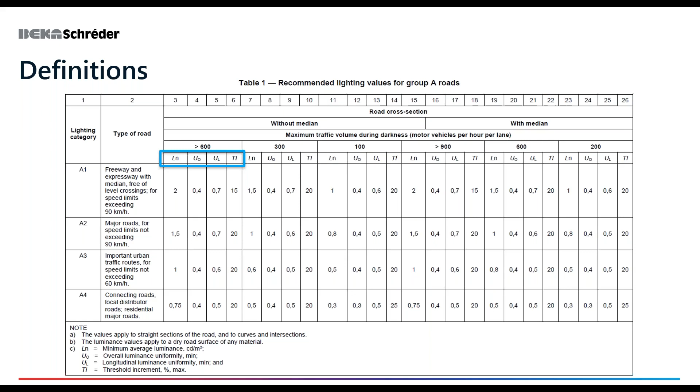Going into the next slide - I think most of the audience might be familiar with this table in SANS 10098 Part 1, but for those who aren't familiar with this type of design, it's necessary to go over the metrics that form the A-class definition. There are typically 4 metrics: minimum average luminance in candela per square meter, overall luminance uniformity, longitudinal luminance uniformity, and finally threshold increment.

Sorry, just moving something out of my way on my screen. In the next few slides, I'll try to clarify a little what these represent. For those who know, this will be a bit of a refresher. For those who aren't familiar, this might be some good information to learn.

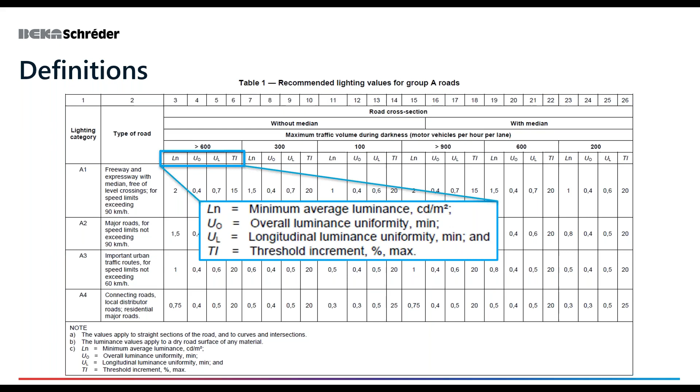The first metric we come to is average luminance, marked by LN. This is the mean luminance over a specified section of carriageway, viewed from a specified observer position that's 60 meters in front of the first transverse row of calculation points and 1.5 meters above ground level. The field of calculation should cover a section of road between two luminaires in the same row. For average luminance, the position of the observer must be at 1/4 of the carriageway width from the left-hand side of the road when driving on the left.

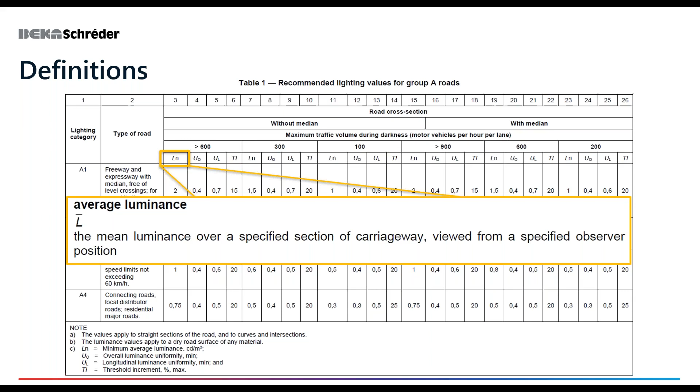The next metric is overall luminance. Just to recap, I'm quickly going through the metrics so that we can understand A-class roads, and then delve into how to design for curves of a road.

The next metric is overall uniformity. This is the ratio of the minimum calculated luminance value to the average calculated luminance value. The observation position must be at 1/4 of the carriageway width from the left-hand side of the road, as for luminance. I've noticed over time that some people do struggle with understanding what overall luminance uniformity is.

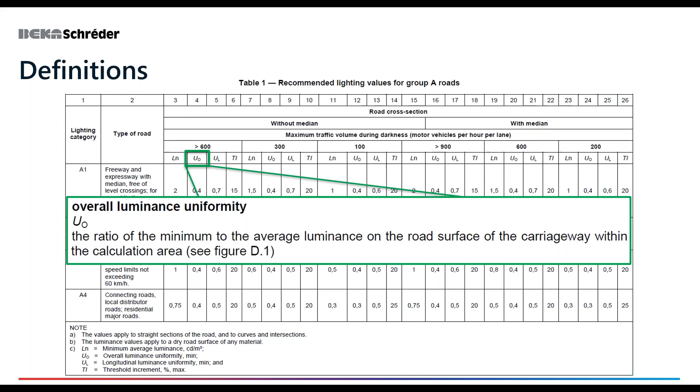So I've created an image to indicate what overall uniformity is. As you can see, I've created two identical areas with the exact same luminaire, placed at the exact same mounting height, in the center of each area. These areas are exactly the same length and width, and the luminaires are at exactly the same mounting height.

The only difference is the optic I've used: the area with bad uniformity on the left has a luminaire using a narrow beam, and the area to the right has a luminaire using a wide beam. It's easy to see that the area with good uniformity has a much smaller difference between the minimum value of 49 lux and the mean value of 142 lux, giving an overall uniformity of 34%, compared to the area with bad uniformity with a value of 7%. Those values are shown top left and top right on the image.

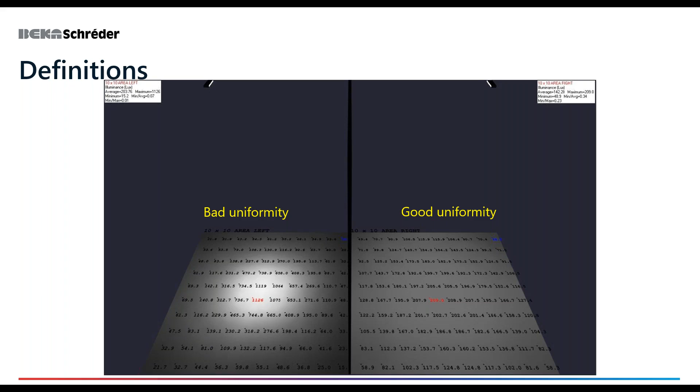I've then created a pseudo intensity image just to highlight, through use of pseudo intensity color, the spread or distribution of the flux incident on the two surfaces. It's quite clear that there is a major gap between the minimum lux value and the average lux value in the leftmost image, whereas that same gap has significantly reduced in the image to the right.

On the left, you've got a really bright hotspot with very high maximums, and in the corners you can see the very low minimum, so that ratio is quite high. But on the image on the right, although the average illuminance has reduced a little, to about 142 lux average, you've got a much more uniform spread of illumination. For the person viewing the luminance as they drive, it's very important to have good overall uniformity.

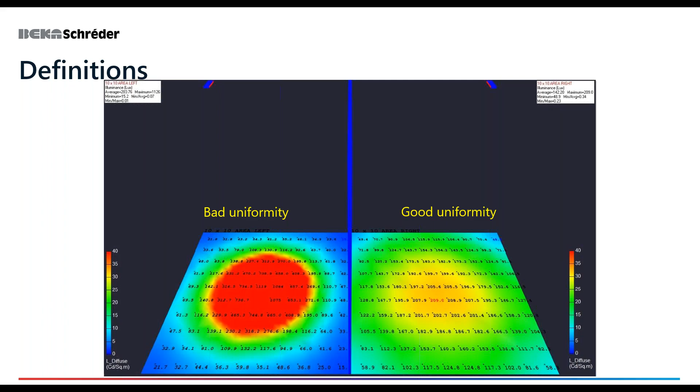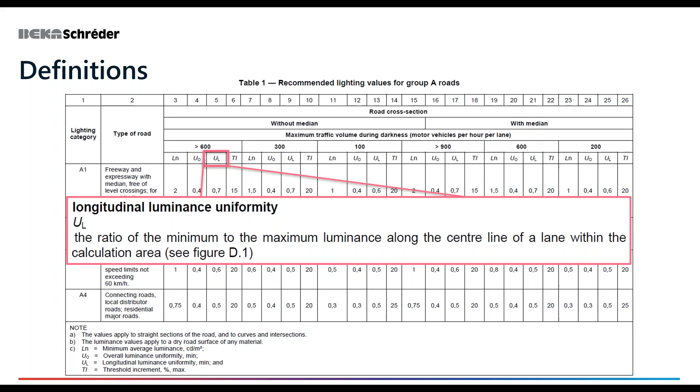The next metric is longitudinal luminance uniformity. This is actually a very important form of uniformity. It's calculated for the center line of each lane, and is the ratio of the minimum value to the maximum value, with the observer placed in the center of each lane at 1.5 meters above the road, facing the direction of travel, measuring the minimum and maximum value, and expressing it as a percentage difference.

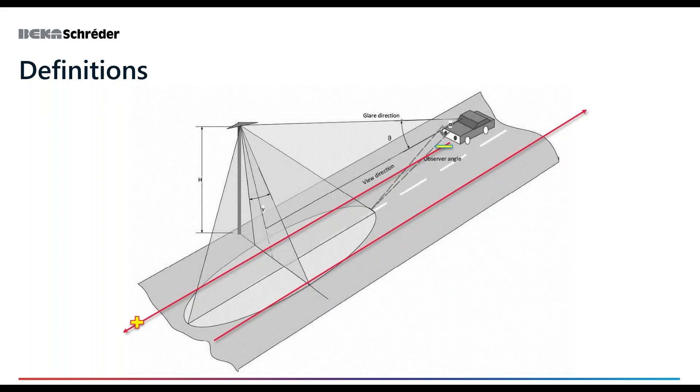Why do we do this? We do this because we need to minimize the zebra effect. The zebra effect is repeated bright and dark regions on the whole road surface, which may cause strong psychological and visual disturbances to drivers, which can become dangerous in the sense that it can cause visual fatigue, your eye having to consistently make thousands and thousands of adjustments to adjust your visual acuity.

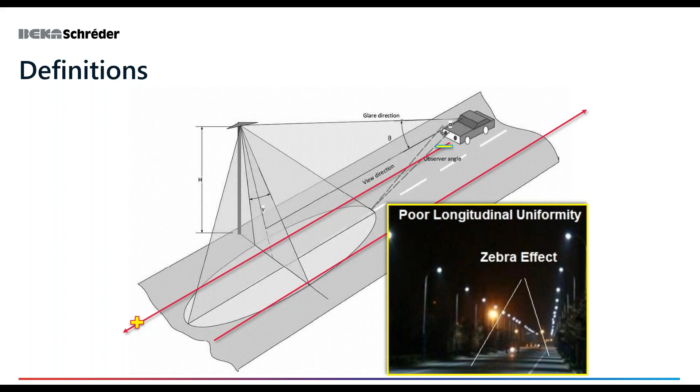Some also say this can cause a type of hypnosis. All of this is dangerous to the road user, to all stakeholders on the road. So it's very important to have good overall uniformity and good longitudinal uniformity. You'll always notice in A-class roads that the requirement for longitudinal uniformity is higher than that of overall uniformity. This is purely for that visual comfort aspect, to make sure that we provide an environment where you can see comfortably and without any undue strain in the whole visual process.

The final metric we look at for A-class roads is your threshold increment. The description in SANS 10098 Part 1 says it's the percentage increase in contrast required between an object and its background for the object to be seen equally well with a source of disability glare present. The threshold increment, or TI, is expressed as the difference between the value of the threshold under glare conditions and the same value without glare.

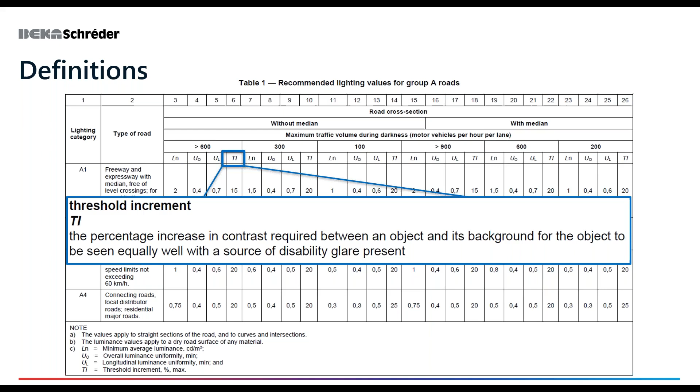This is expressed as a percentage of the value without glare. I've tried to find an image that really represents what's being said here, because I know language can become confusing. When I started in lighting, this was something I really struggled with, but I think I found something that might help.

In this image, on the left and center, you can see the sources of glare in a pseudo intensity view along the road. On the right, I've tried to indicate the object to be seen with a source of glare present. You'll notice that due to a large difference in contrast between the source of glare and the object to be seen, we cannot see into that area at all. There's no way we can see what's happening there.

This image also shows a little more clearly the effect of veiling luminance, which is a luminance superimposed over the eye's retinal image produced by stray light within the eye. The word veiling luminance gives you a good verbal understanding of what that light does.

My mentor, Mr. Marie Cronier, always said it's like the bride's veil - the light being emitted out of the luminaire creates a kind of veil over the retina, over your eye, over your perception, and you have to look through that to try and see. This is why it's important to take TI into account, and that's why the standard allows for a threshold increment.

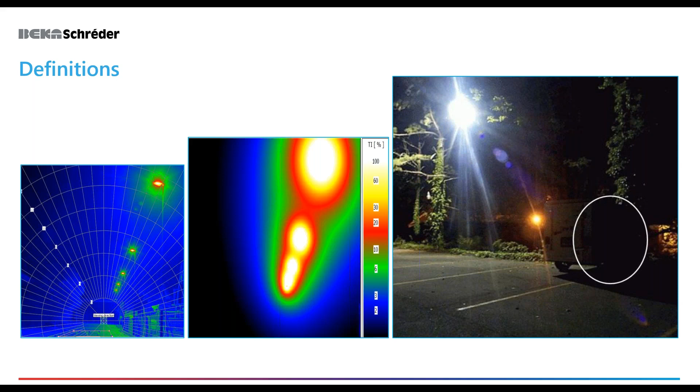Okay, now we've gone through the metrics. We're going to now start on a recap through an example of Ulysse and what it can do, and then how to determine spacing on a road.

Now that we've refreshed our understanding of the metrics used for A-class roads, we'll, through use of this example, also recap on the use of Ulysse 3 in optimizing street and road lighting designs.

We're going to assume this is an A-type road. Obviously this isn't an A-type road - in reality this would be a B-type road or street. But for the purpose of this exercise, we're assuming this is an A-type road, and that we're going to also allow for that curve or bend in the road.

First we need to calculate the best spacing at the lowest mounting height using the least power in order to achieve the required class of lighting as per the standard. We will then need to allow for the curve, also as per the standard 10098 part 1.

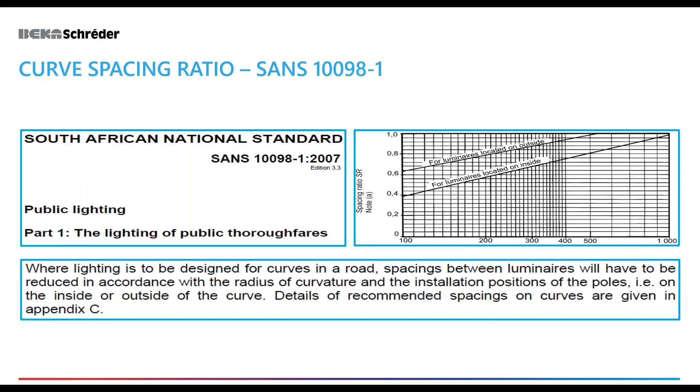24.2705 plus 15,189.08 meters, divided by 388.328 meters, which is 8 times 48.541. And we get 24.2705 plus 39.114 meters, which is approximately 63.38 meter radius. So now we know that if this was a circle, the radius would be about 63.38 meters for that arc.

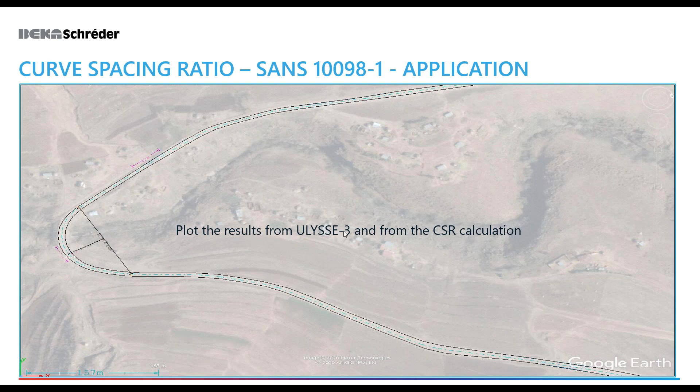Where if you do not do this, you're actually endangering people's lives who are entering this bend, those who are driving, and also potentially those who might be living on the edge of this curve, where they might lose control, or whatever could happen. We need to make sure that when doing a lighting design, we always provide the safest possible results.

Okay, we've gone through this. Once you've calculated, you can now quite clearly see the effect it has on the road. What I did here was I took the values from Ulysse, and I took the curve reduction factor. I then opened my AGI, this lighting design software, along with the Google Earth image you've seen, going back to that slide, which was this Google Earth image.

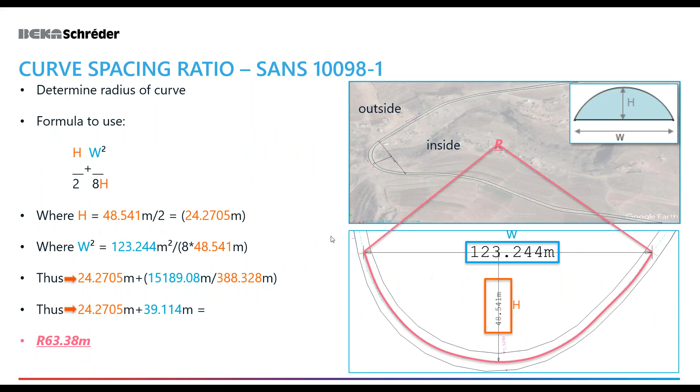This is paramount to the safety of all the road users, all the drivers.

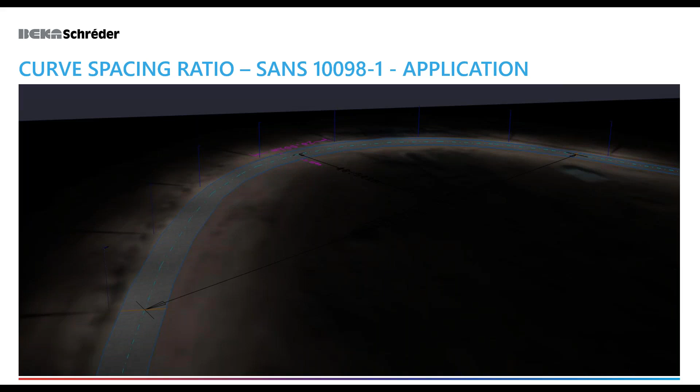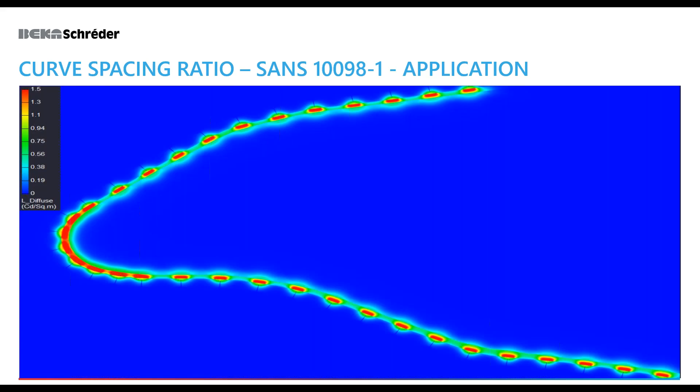I've also indicated the installation in a pseudo intensity image, so that you can see the average on the straight sections of road, and then how it increases on the bend as per the standard. There's also an isometric view here to show how that's increased. You can see we're achieving areas of 1.1 to 1.5 candelas per square meter. In fact, in the red areas, the red indicates a minimum of 1.5 candela per square meter and higher. And that's the bare essentials of designing for curves in the road.

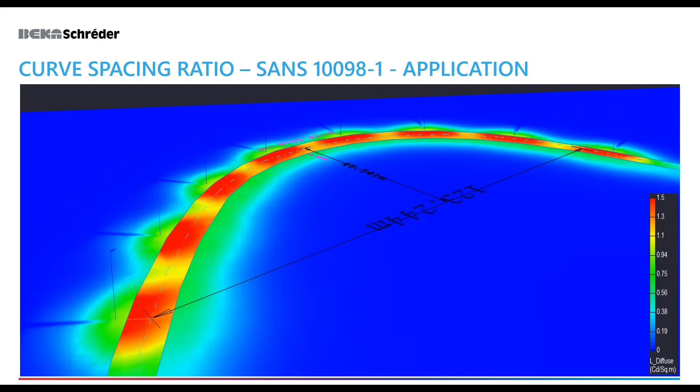Okay, so as a summary, I've gone through the definitions of A roads, looking at luminance, overall uniformity, longitudinal uniformity, and threshold increment.

Let's recap using this example for a road specific example, using ULYSSE-3. We need to identify the road that we're going to calculate for. We need to understand what needs to happen there. This is normally information that the client provides us. We have to then create a cross section in ULYSSE, so that we can produce a valuable lighting design, and then optimize so that we provide the client with the most cost-effective and the best solution possible before we plot. And then using the lighting, the Appendix C, we can then accurately design and figure out the reduction factor on curves for specific roads.

And then once we've done that, I hope this was an informative session where we could help those who already knew how to implement this curve spacing ratio have a bit of a refresher, and also assist those who didn't know to gain a bit more knowledge on another part of the dynamics of street lighting design. Thank you for the opportunity.

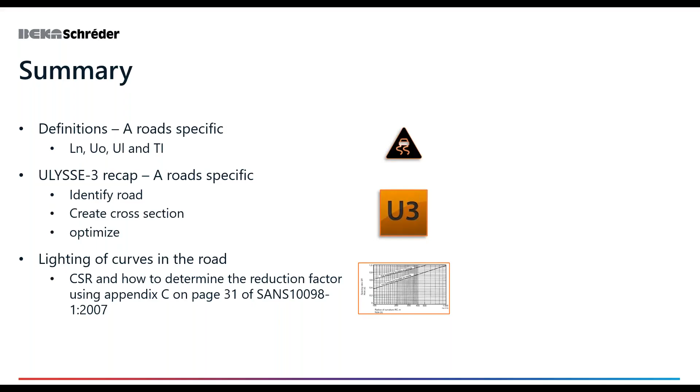Get my laser pointer. This shows the minimum radius. So even if you had a hairpin bend coming right back on itself, this is what you would apply. Obviously, there's no such bend, but this is the minimum curve spacing ratio you start at, and then determine the factor for luminaires on the outside or inside, the way I've shown you in the presentation.

Next question: does tilt increase TI? Generally it would, but it's dependent on the design of the optical control. Some optics are designed to be tilted or raked so you can throw a lot of flux across the road, specifically on wide roads, but we still need to reduce the TI, the glare.

Also, generally, the TI is affected by the maximum intensity area on the photometric web, where that maximum intensity lies and how the flux is emitted from the luminaire. But as a simple answer, if you increase the rake, you're going to see more of the flash area or luminous opening. So yes, glare will potentially increase, but that's why when we design, we make sure it's all within the standards and compliant.

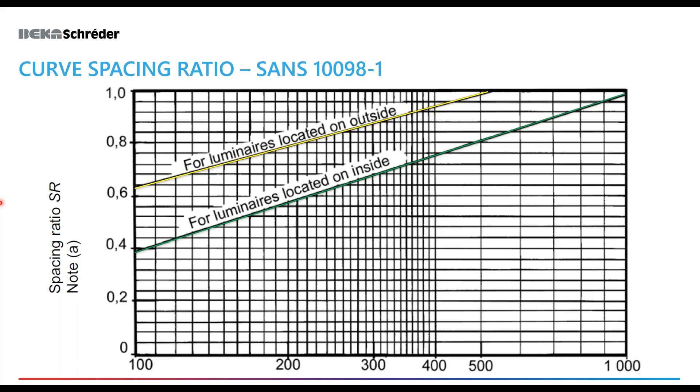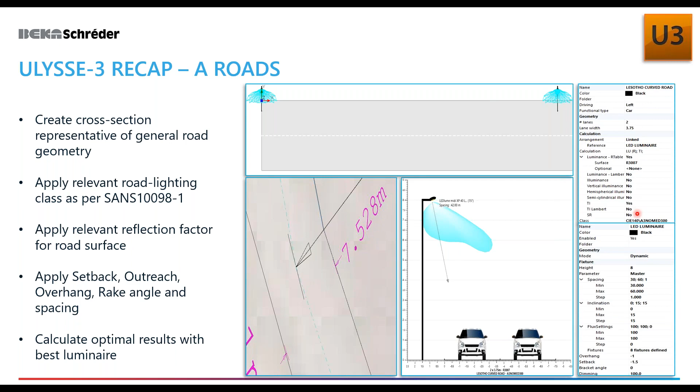If you can see in this slide, after we input or populated all the parameters to be calculated for, I calculated that 42 meters was the best spacing we could achieve with any of the family I put in as a reference, and we can see that 42 meter spacing between poles on a straight road was the optimal spacing.

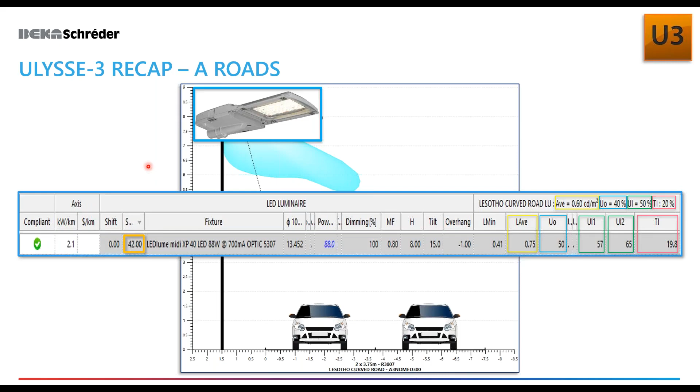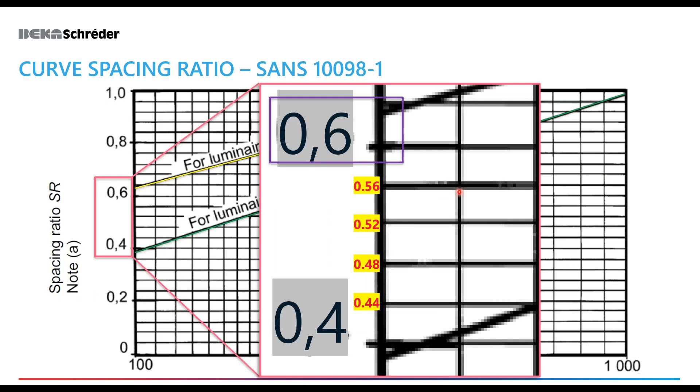I then multiplied that by the curve spacing ratio, which we calculated to be 0.632. So once you calculate the 42 meter optimal spacing with 0.632, which is the curve spacing ratio calculated using Appendix C, we achieve a curve spacing of 26.5 meters. I hope that answers that question.